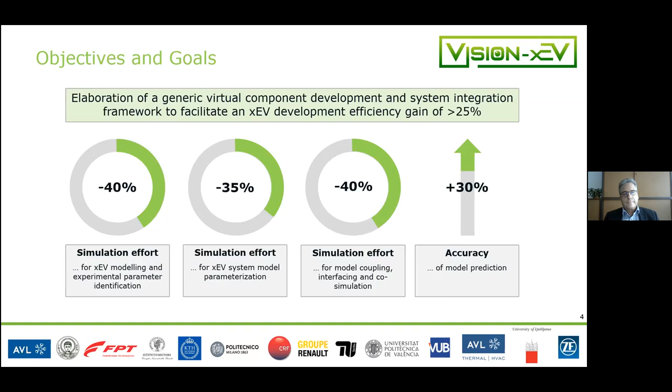The research and innovation activities of VISION-xEV are carried out according to the requirements and needs of dedicated development tasks related to 4 use cases defined by the industry partners CRF, Renault, FPT, and AVL. So these use cases are related to battery thermal management optimization, internal combustion engine and after-treatment system matching for a plug-in hybrid passenger car vehicle, heavy-duty hybrid powertrain system architecture analysis, and electrified powertrain thermal and energy management.

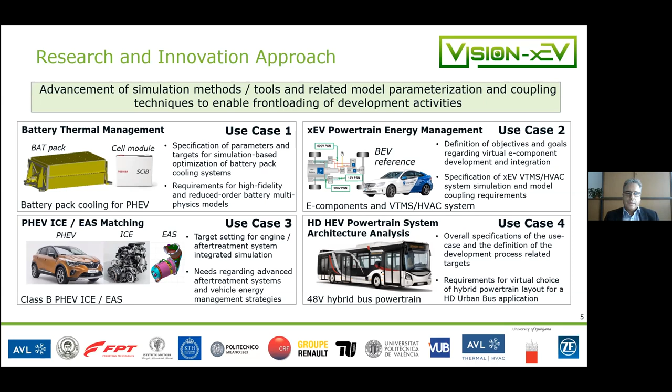The detailed objectives and goals of the work packages are closely related to these use cases, and these will finally also serve as the basis for the assessment of the target achievement of the VISION-xEV project. The focus of the specific research activities are on the development of scalable 3D and 1D models of the major components and subsystems of electrified powertrains. And these comprise models of battery, e-machine, inverter, also engine and turbocharging and after-treatment system, especially important in the context of hybrid vehicles, including the related methods for their seamless parameterization.

The activities are also aimed at the elaboration of interfacing, integration, and co-simulation technologies and the related methods for fast and easy coupling of the models of the different electric components, the thermodynamic components, as well as the electrical, thermal management, driveline, and vehicle models. And finally, the consortium will demonstrate the applicability of the newly developed and updated models and methods to dedicated simulation tasks related to the 4 industrial use cases, and perform an assessment of the impact of the VISION-xEV project with respect to the achieved development efficiency gain.

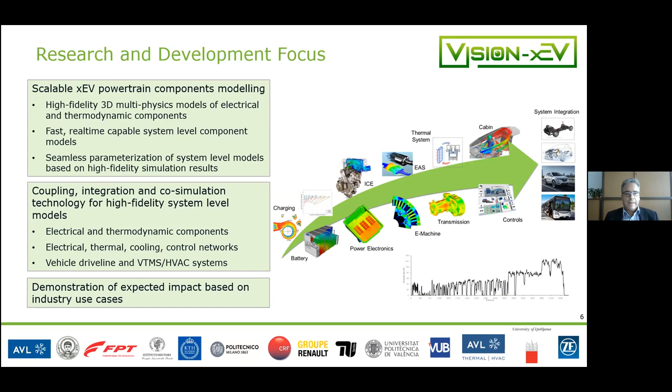In the following, let me outline the activities and major outcomes achieved so far regarding performance and thermal modeling of the electrical components adopted in hybrid and battery electric vehicles. In the first period, the project activities in the area of electrical energy storage modeling were devoted to elaborating a consistent workflow for integrated battery and supercap performance and thermal simulation. The work of the partner VUB was dedicated to streamlining the experimental battery cell characterization and parameter identification process, and to set up 1D electrothermal cell models as well as detailed 3D battery cell models. Validation of the resulting models has been achieved by comparison of the simulation results for a broad range of charging and discharging characteristics with the corresponding experimental data.

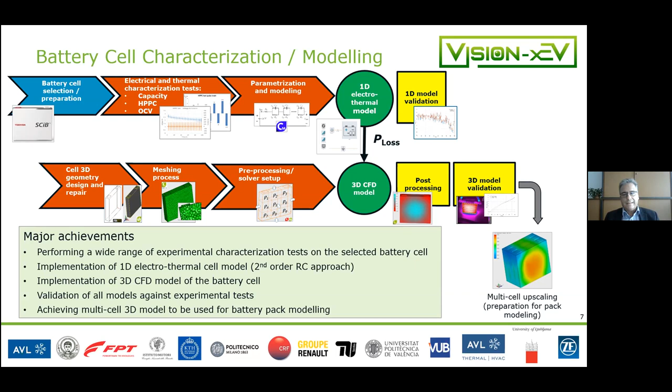The activities of partner CNR were focusing on the experimental characterization and model development for lithium-ion capacitors, again for a wide range of operating conditions in terms of charging and discharging and in terms of temperature range, as relevant for the industrial applications. For this purpose, a test environment was set up at CNR and equipped with the necessary electrical and thermal measurement devices, along with the related testbed software.

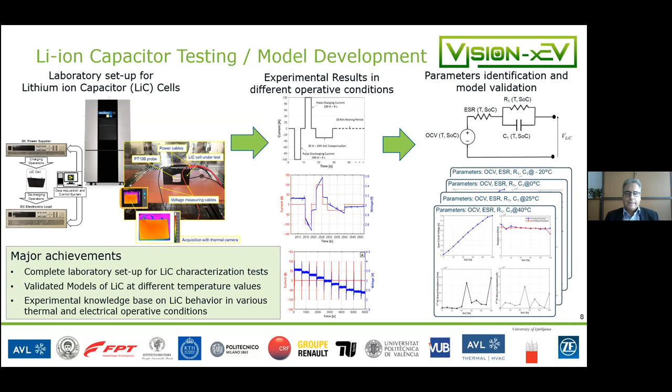The cell performance tests and thermal characterization were done for a broad range of pulse charge current characteristics, as well as ambient temperature conditions. The simulation models that were set up based on the experimental data were aimed at fully reflecting in an accurate manner the electrical and thermal cell behavior, and these were finally validated on the basis of the experimental test cases.

So in order to enable seamless import of the experimental data as well as the battery and supercapacitor models developed by VUB and CNR, AVL suitably adapted and extended the interfaces of its in-house 1D and 3D simulation tools.

With this, hybrid pulse power characterization measurement data can now be directly imported and used for calibration of equivalent circuit and semi-physical cell models to be further used in the different 1D and 3D simulation platforms of AVL. These platforms now also support the direct import of equivalent circuit model parameters, as well as the import and interfacing with third-party models provided as FMUs, for instance.

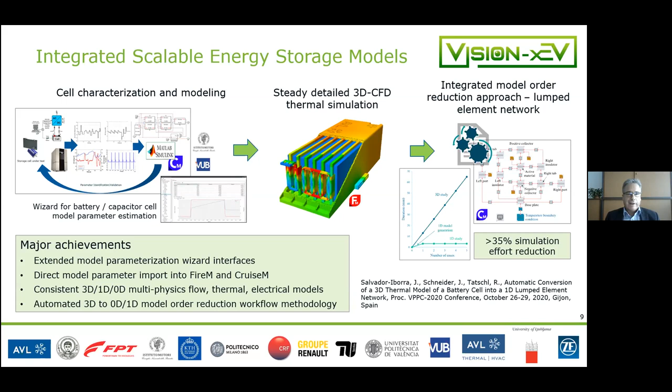In order to fully utilize the accuracy of the detailed multi-physics 3D modeling in fast 1D system level simulation, a model order reduction methodology was developed as well and validated for application to energy storage devices. With this newly developed methodology, a considerable reduction in model setup and parameterization effort could be achieved when compared to traditional approaches.

The e-machine modeling activities were conducted at the University of Ljubljana and are related to the detailed development and validation of an integrated multi-physics modeling and simulation of different types of e-machines. The chosen methodology for the modeling fully takes into account the electromagnetic, thermal, and fluid flow effects onto the performance and thermal losses of the induction machines and externally excited synchronous machines.

The novel approach adopted for the modeling allows also for the thermal connections to be made to the inverter and also to the gearbox, for instance, which goes considerably beyond the current state of the art. The realistic description of the heat flow between the main components of the e-machines and the neighboring powertrain components the e-machine is embedded in, combined with nonlinear electromagnetic properties of the e-machine, now allows for comprehensive studies to be conducted of e-machine characteristics with a strong emphasis on its thermal behavior, especially in overload operation.

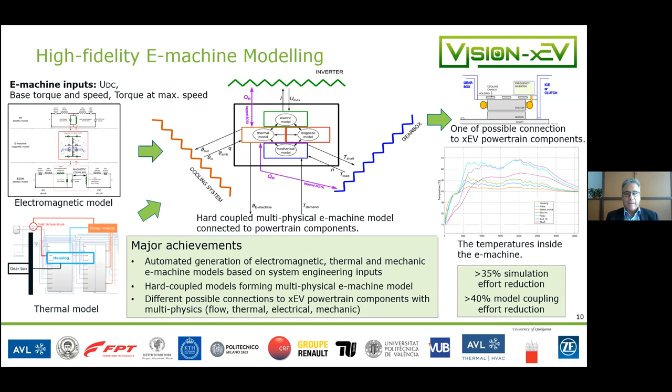High-fidelity multi-physics 3D models of inverters were set up by AVL Thermal and HVAC to investigate the performance and the thermal behavior of these power electronic components under real operating conditions. The 3D inverter model was then used as the basis for the automated generation and parameterization of a 1D thermal model, again based on a suitably developed model order reduction technique.

Besides that, a 0D electrical model of inverters has been set up, which includes functions to calculate the transistor losses as well as the ohmic heating losses of the bus bars and the wires. A methodology for coupling of the thermal 1D model and the electrical 0D model was developed as well, enabling now to efficiently perform electrical thermal simulations of all kinds of inverters and other power electronic components adopted in future vehicle powertrains.

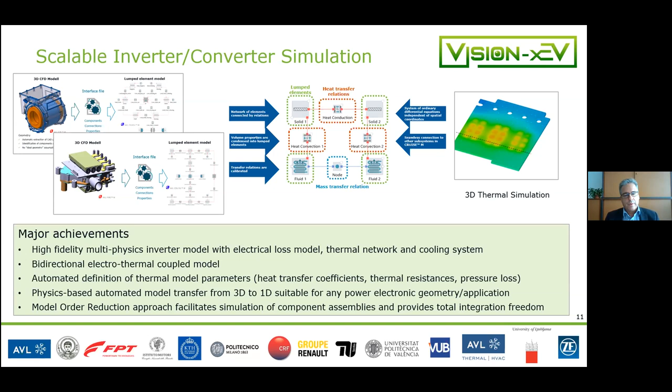In the following, the activities and the major outcomes achieved by Politecnico di Milano, University of Thessaloniki, University of Valencia, and further partners regarding performance and thermal modeling of hybrid powertrain thermodynamic components are presented.

In the context of advanced engine modeling, 1D models of the engines adopted by the industry partners in their use cases were set up. These models include detailed submodels of the corresponding intake and exhaust devices, the turbocharging elements, as well as the corresponding engine coolant and oil circuit models. Model validation was achieved based on reference experimental data provided by the university partners.

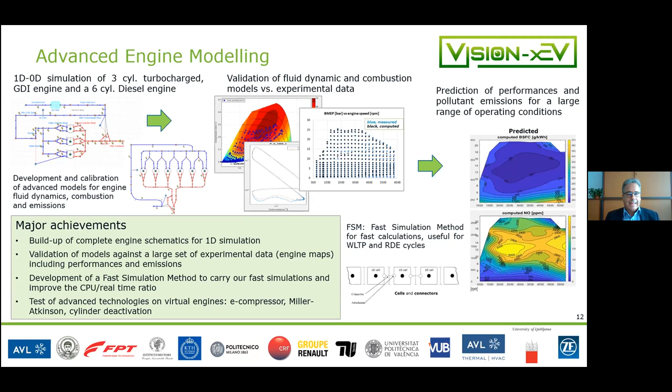These models now serve as a basis for the application to investigations of advanced engine technologies in combination with powertrain hybridization, with these engine technologies comprising, for instance, electric compressor devices, adoption of Miller and Atkinson cycles, cylinder deactivation, and others.

To capture the transient engine thermal behavior, a model for simulating the movement of the incompressible fluids, so the coolant water and the oil, and to predict the heat exchange between the solid structure elements and the coolant and oil fluids was developed, and resulting models were set up and validated for engine operating parameters that were obtained by testing the engine on the test bed for plug-in hybrid electric vehicle use cases and operation under both motoring and firing conditions.

The integrated thermal model resulting from these activities is characterized by high accuracy and high simulation performance, and is available as a functional mock-up unit for being linked with the engine models developed by partner Politecnico di Milano and being embedded in vehicle powertrain models provided by the other partners in the next phase of the project.

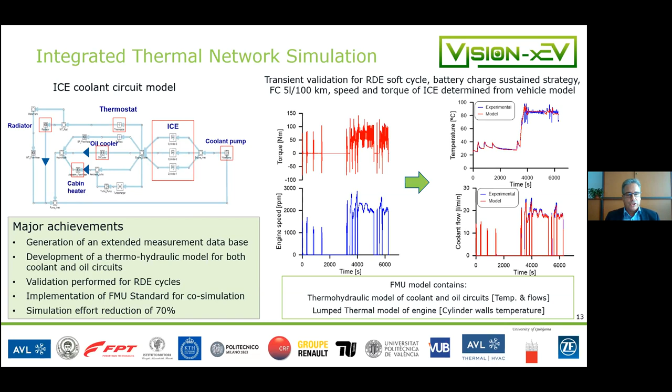Activities on turbocharger modeling at TU Berlin and KTH were aimed at further advancing the methodology for joint simulation and experimental characterization of turbocharging devices and e-compressors that are becoming increasingly popular in electrified and hybridized vehicle configurations. For this purpose, both adiabatic and diabatic experimental investigations on special hot gas and e-booster test benches were performed.

These experimental tests and related 3D CFD simulations under real engine pulsating flow conditions were then used to upgrade available models for the turbocharging devices with regards to taking into account the heat transfer inside the turbocharger and the e-booster on the performance. The 3D simulation results also enabled the development of an exergy-based loss estimation method and the generation of advanced thermal models of the engine air path turbocharger system with a largely improved prediction accuracy.

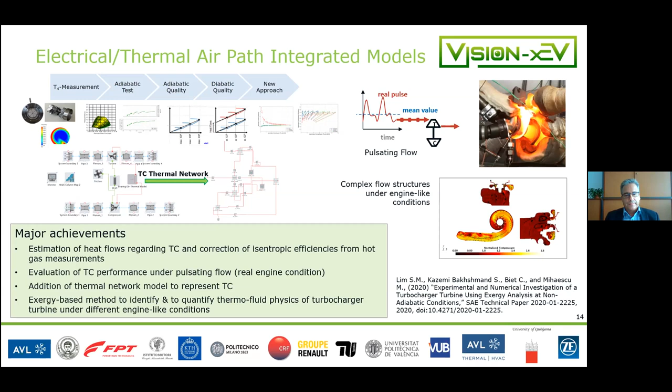Well, compared to conventional non-electrified powertrains, the post-Euro 6 exhaust system in electrified vehicles is expected to be highly complex and potentially involving technologies like electrical heating and phase change materials. In addition, the long zero flow operation of the exhaust system in hybrid applications during pure electric driving and the associated risk of a light out of the exhaust after-treatment system imposes quite tough accuracy requirements regarding the heat loss simulation.

So therefore, the after-treatment system component models and methods were suitably extended into these directions, and new models were developed by University of Thessaloniki in close cooperation with Renault to deal with these challenges. The newly developed models were thoroughly tested in order to ensure its validity over a broad range of operating conditions, and also to ensure the connectivity and portability within the simulation model ecosystem developed inside VISION-xEV.

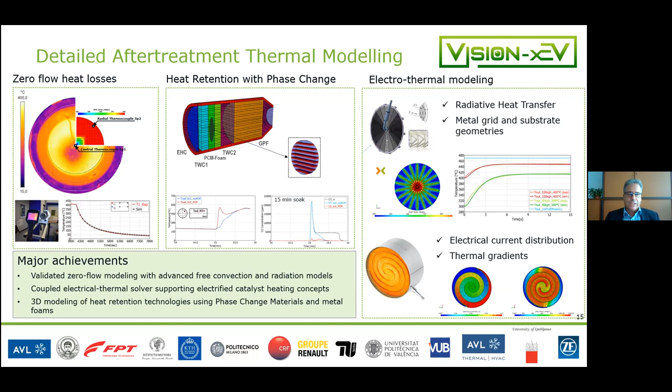So as a result of the component modeling activities in the first 18 months of the project, a comprehensive set of easy to parameterize models with increased predictive accuracy is now available. And furthermore, innovative approaches for seamless model order reduction and parameterization of fast system level models based on high fidelity 3D simulation results were elaborated.

In the second phase of the project, we're now focusing on integrating and coupling the different electrical, thermal, and thermodynamic powertrain component models together to build up the generic framework for the virtual analysis and optimization of the different xEV related engineering tasks. So in this context, different coupling strategies ranging from direct model implementation via FMI-based model coupling to multi-rate co-simulation techniques are going to be investigated.

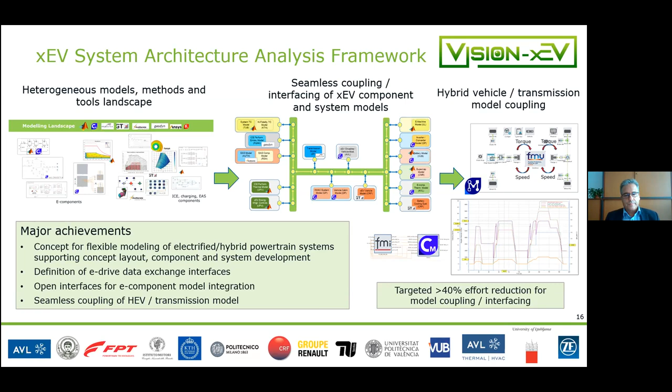At the current state, the overall concept for the flexible modeling of the electrified and hybrid powertrain configurations, supporting different levels of fidelity and complexity, is fully defined, and first coupling tasks have already been successfully realized. Considerable achievements, for instance, have already been obtained for the coupling of the engine and the after-treatment system models, allowing now for application of the coupled simulation models to various analysis tasks, such as prediction of tailpipe emissions for different drive cycles, or the evaluation of the impact of engine start-stop operation on fuel consumption and emissions.

And besides, a novel methodology has been developed to speed up the simulations and to achieve CPU to real-time ratios close to 1. Future activities in this area will focus on the assessment of different coupling and co-simulation strategies and to widen the portfolio of the supported models and tools.

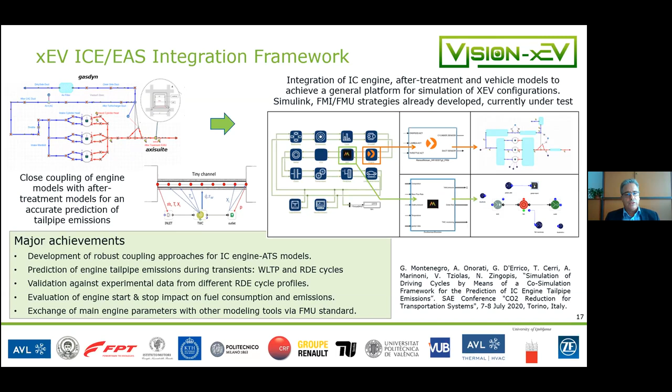So due to its importance for the overall energy consumption of hybrid electric and battery electric vehicles, major focus of the research work in the second phase is also on the elaboration of a comprehensive thermal system layout framework. So this framework is intended to also fully support vehicles' thermal management systems and heating, ventilation, and air conditioning system layout and optimization. So a flexible open framework architecture is supposed to allow an easy coupling of the VTMS and HVAC system models with the electrical and thermodynamic powertrain component models of the partners as they have been developed and set up in the first phase of the project.

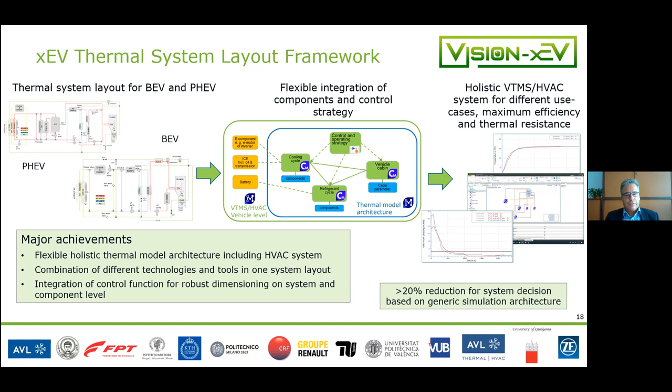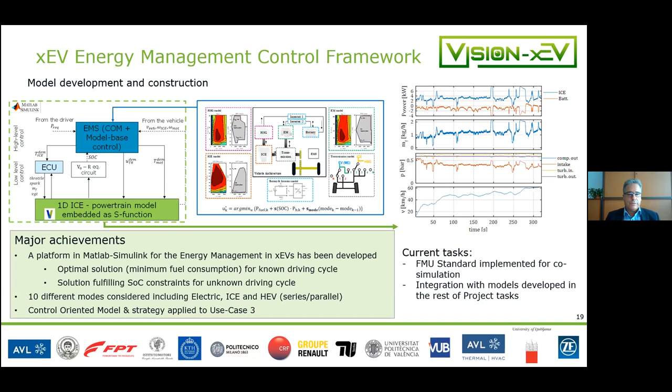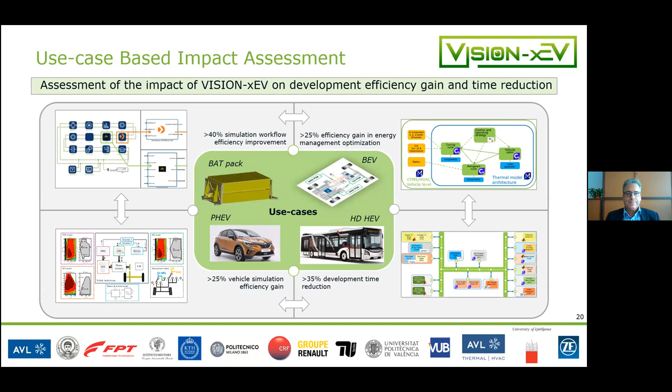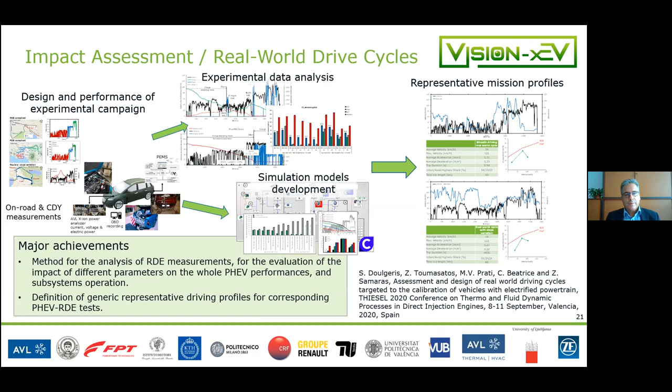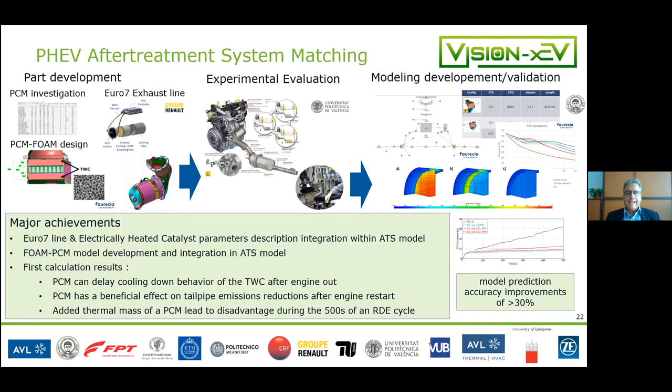With regards to the plug-in hybrid electric vehicle use case of Renault, the use of different power sources, thermal and electric, results in a complex interplay between the engine and the after-treatment controls. Therefore, the simulation models of the innovative catalytic after-treatment components are going to be set up, including electrically heated catalyst and phase change materials for the use case. Such innovative exhaust line concepts will be further evaluated on a virtual basis, with the experimental data used to validate the model-based development approach.

Regarding the FPT use case related to the hybridization of the city bus configuration, component and experimental data have been exchanged with the partners as input to the model setup and parameterization. The initial version of a co-simulation environment to build the integration simulation framework for the related use case is already under preparation. In addition, the baseline regarding the current development practice has already been established and will serve as a reference for demonstrating the achievement of the main technological objectives in the final project year.